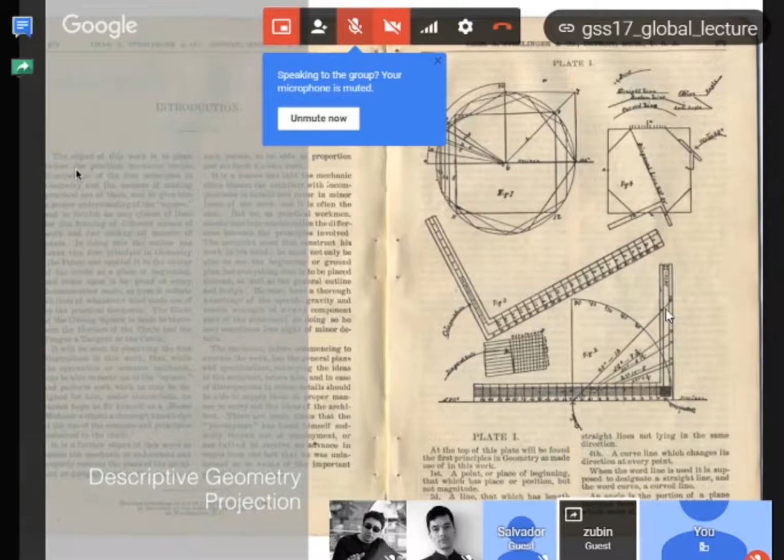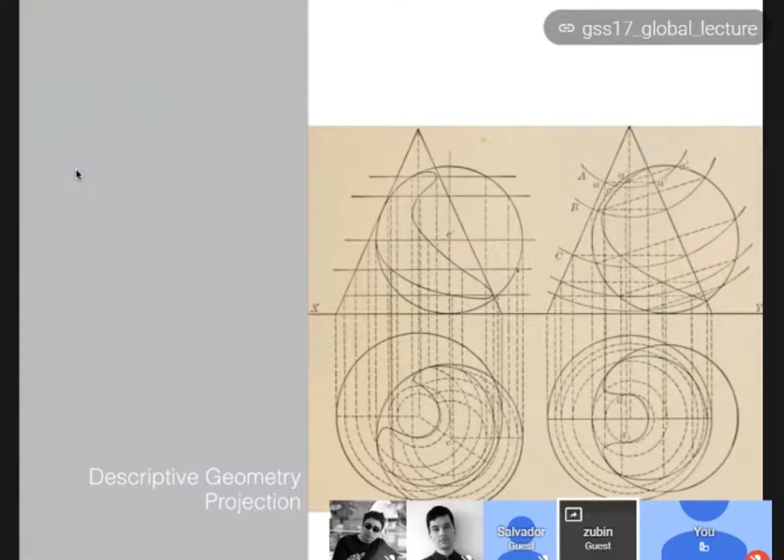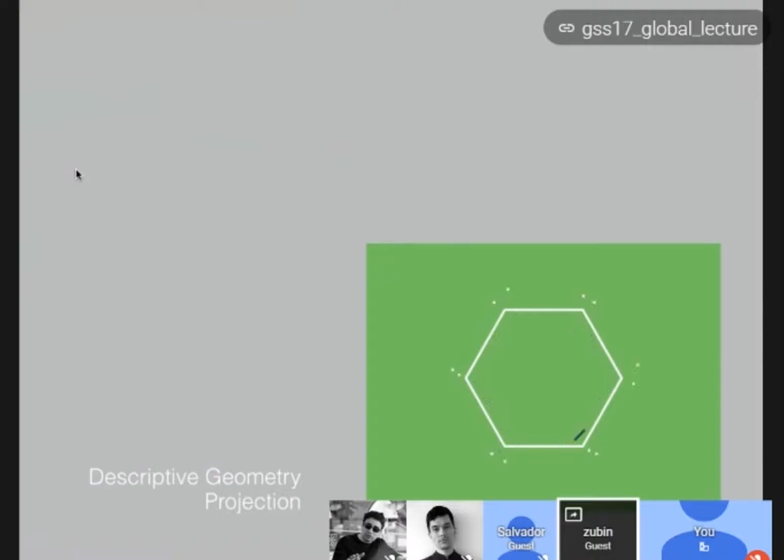In the very first part, architecture was geometry through projection, or let's say descriptive geometry, as a branch of geometry. In this very first use of geometry, architects were trying to project their designs into 2D spaces, so mainly drawings. And that was the very interesting part, to see how 3D objects could be projected into 2D. Through projection, architects started to visualize how their models and ideas could be transferred into drawings and be constructed later on in projects.

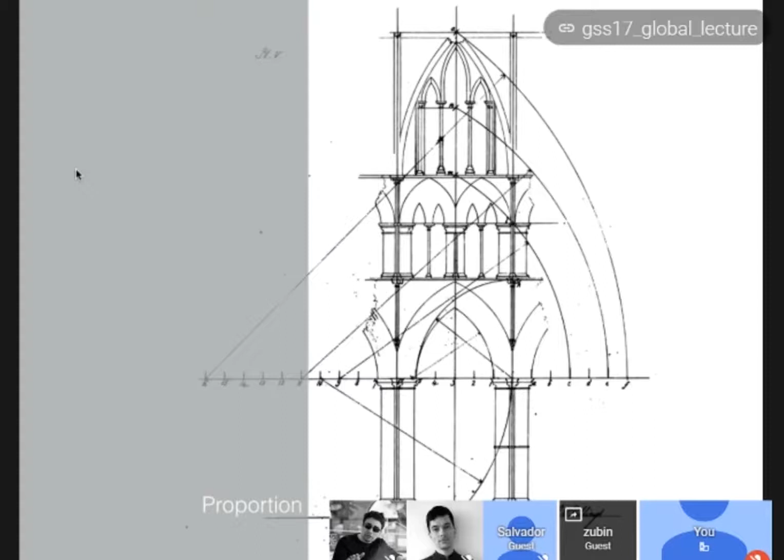But then later, the main topic for architects related to geometry was proportion. Little by little, as the styles of architecture progressed, you can see how proportions started to play design roles in architecture. For example, what would be the ratio of the height of an arch related to its openings, or that kind of studies. And then there was this idea that God had created the world by establishing the principles of order and proportion. This is the quote from Jacques Bénigne Bossuet, a philosopher.

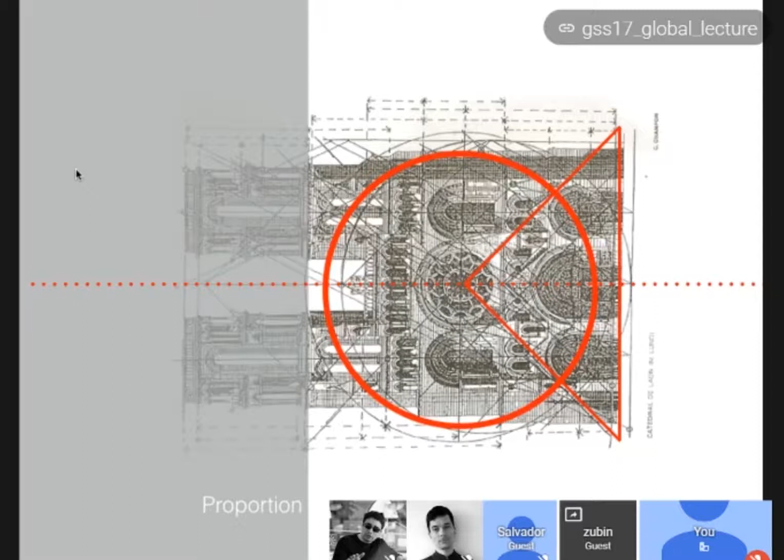And this is the moment where architects would think that they have a sort of power being transferred from God to them. So architects would have the job to see these proportions, the order in architecture, and try to convert it into the physical environment. So proportion would be the next entanglement of architects and the science of geometry. But the next step for architecture and mathematics is proportion versus calculation.

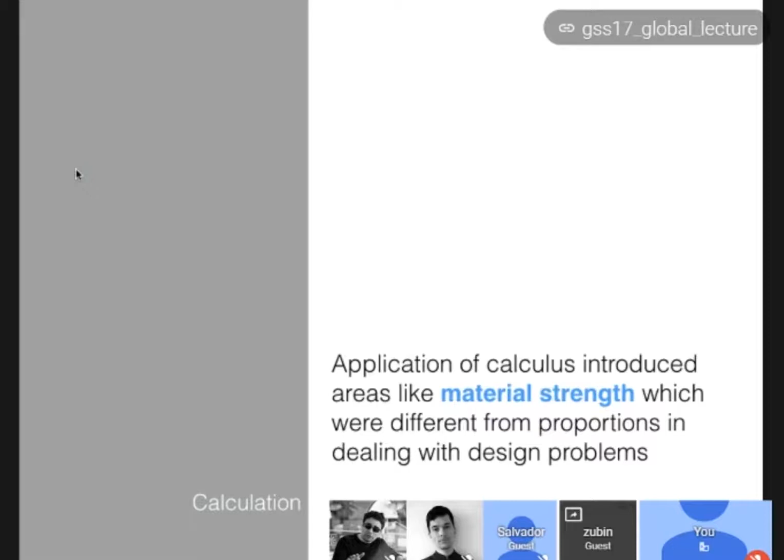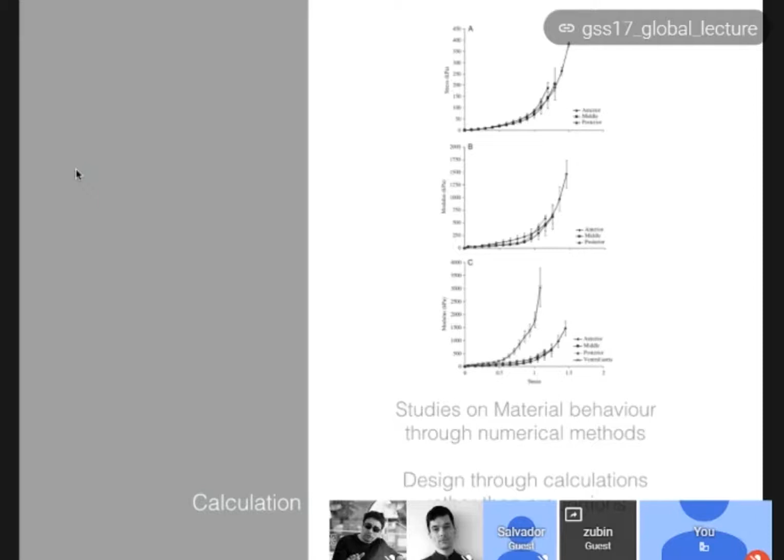So in this part, scientific studies started to appear more importantly in architecture. For example, here you can see that architects started to study material behavior, what the material strengths are, and how we study materials and their behavior in relation to physical laws. This material behavior started to be transferred into design practice, to see how calculations could help us design our projects rather than proportions. So instead of studying the rules of proportions, material behavior and other scientific studies of materials started to appear in the design of projects.

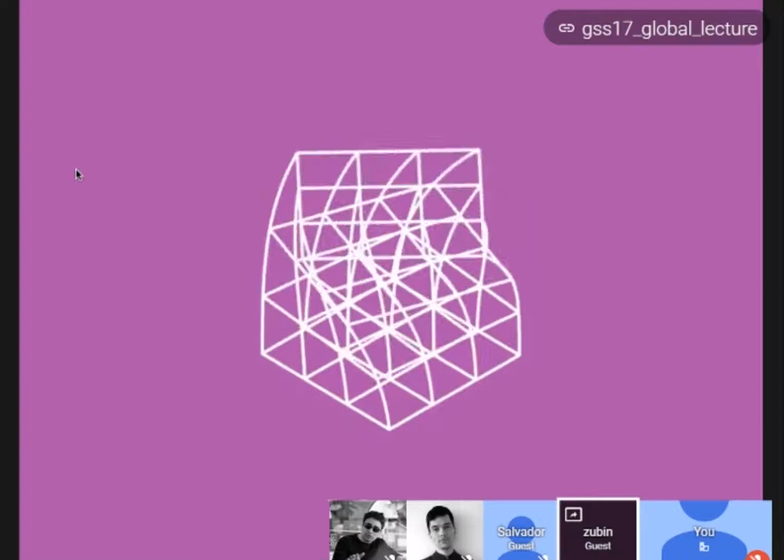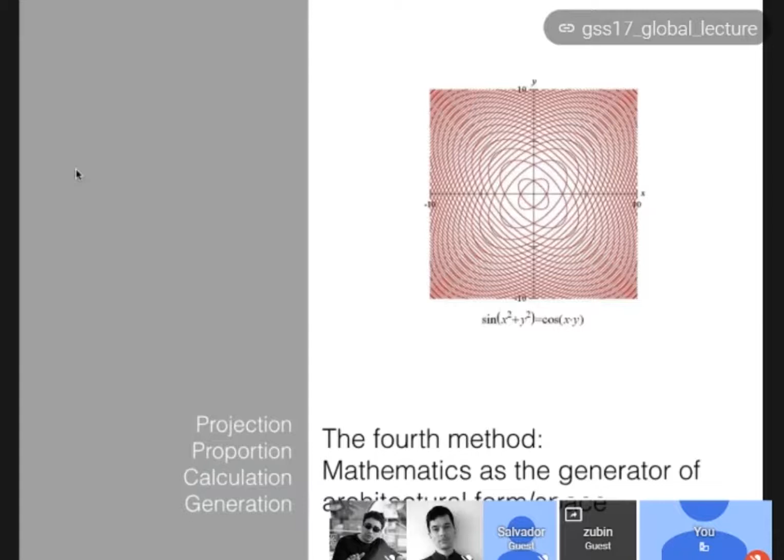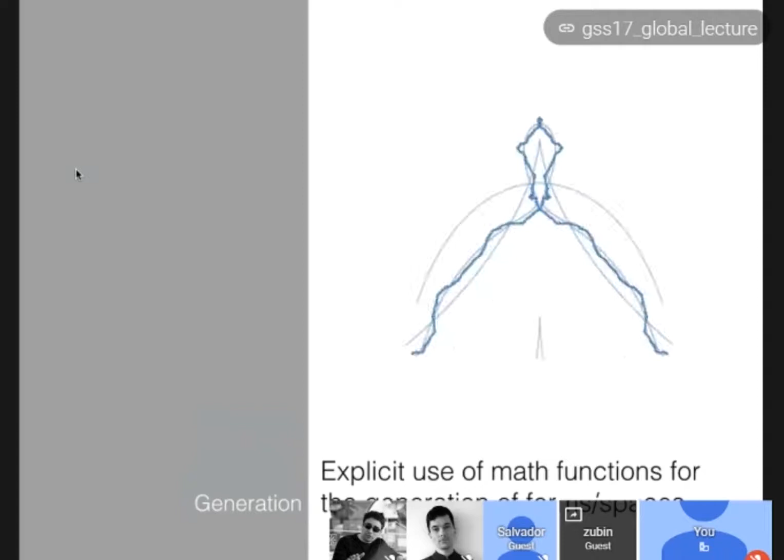So going through these three main stages of the relation of architecture and mathematics, the next stage would be us these days dealing with explicit mathematical definitions, using explicit definitions in our software like Rhino, Grasshopper, Processing or whatever, and trying to see what kind of geometries and spaces we could generate through this kind of experimentation with explicit mathematics. So this is the new state of using mathematics in terms of the generation of space.

And based on these new techniques that I'm sure you're almost all familiar with, we have tried to design and fabricate a couple of different pavilions together with Meron, who is here actually. So these are projects where we explicitly use mathematics. And this is the first one that we worked on together, and I hope you join me as well to do a little bit more description.

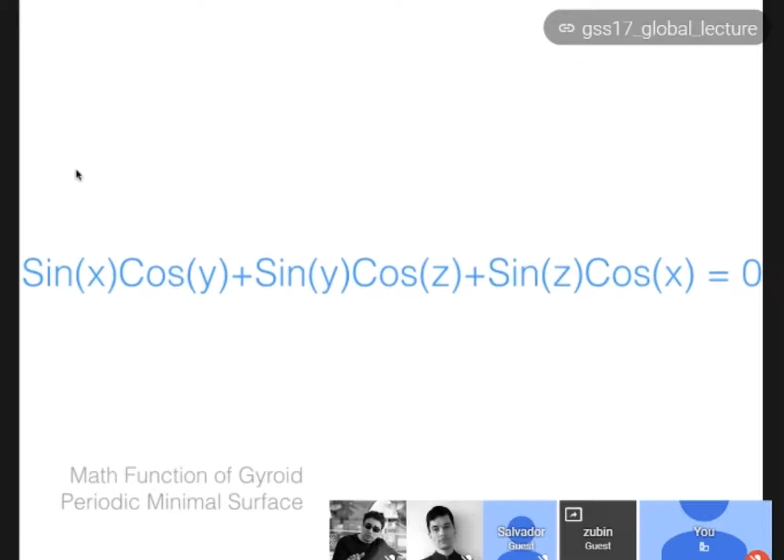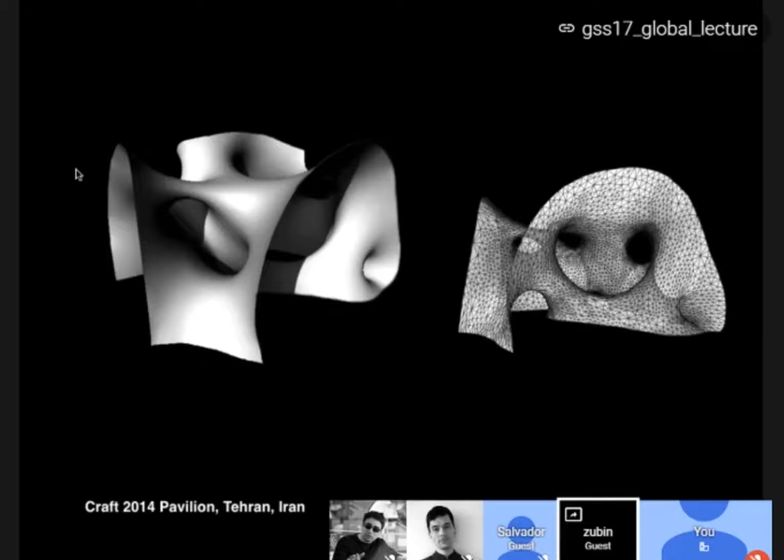The very first example: we had a mathematical definition of a gyroid surface. How do we use this kind of mathematical definition to develop a pavilion project? How could we refine the mathematical definition, how do we interpret it, and propagate it at scale to see how this works?

So there were a couple of different avenues of study. The first one was, as I mentioned before, how we design a project using mathematics. And then in parallel, we were trying to develop composite materials that we could use to fabricate the model we were developing at that stage. So a couple of our students started to explore how composite materials would work for the formation of these freeform surfaces. And this is the example from our 2014 project here in Tehran.

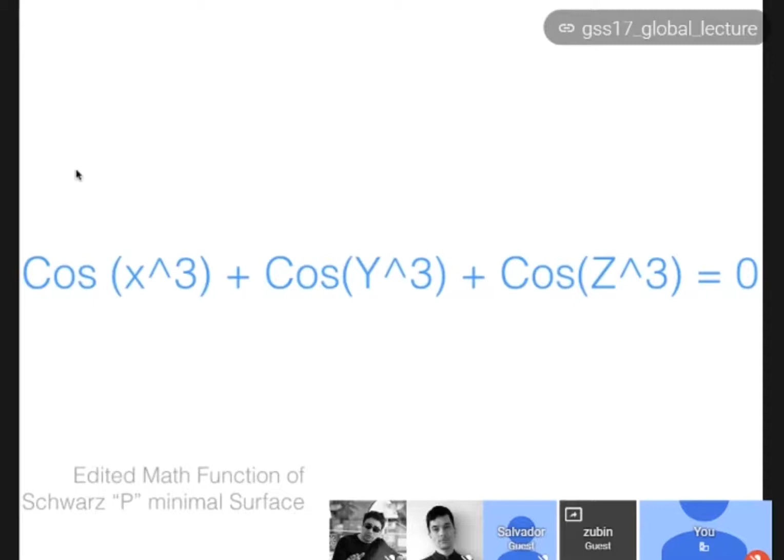It was our first try, and we faced a couple of problems with form accuracy, material strength and everything, but we tried to overcome all the problems by continuing the project. This time we started on another form, again coming from mathematical definitions, this time an edited version of the Schwarz P minimal surface. We again developed similar strategies to see how these thin surfaces could be addressed, also manipulated a little to incorporate other needs of the project. Because it was a pavilion, we wanted to walk inside, we wanted enough enclosure and that kind of property.

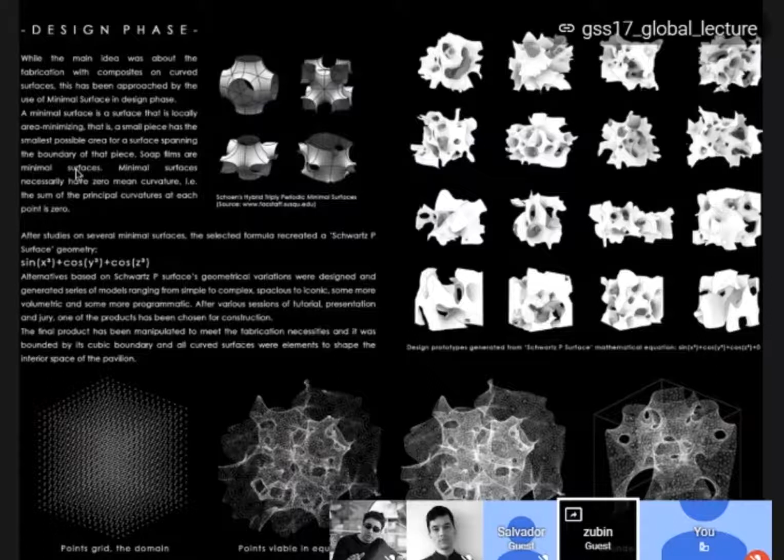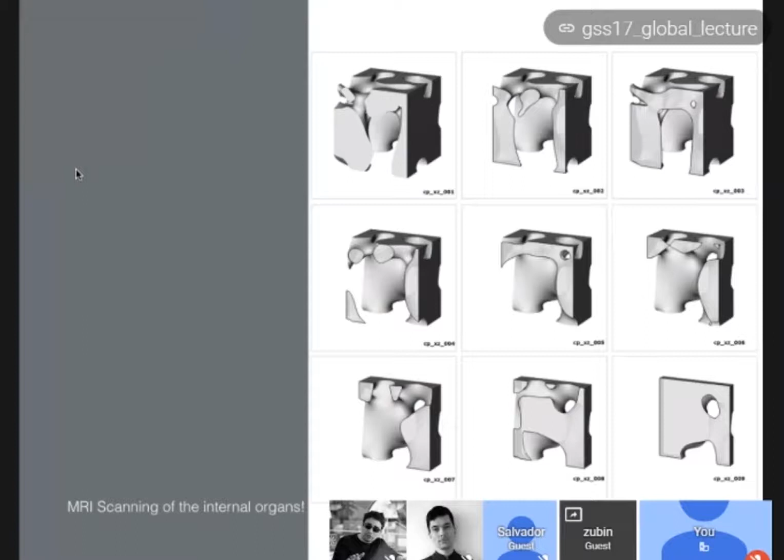So we started to manipulate the formula to see outputs that could benefit the needs we wanted. Here you can see a catalog of some of the generated forms, and then we tried to refine and get the best output out of the catalog. This is the imagination of our students. They wanted the external surface to be like a mirror, with some internal curvy shape. In contrast to the previous year, they wanted a sort of box as the exterior form enclosing the curved surface inside the pavilion. This is a sort of MRI scanning of the project. You can see that we could walk inside; the internal space is big enough to incorporate people inside.

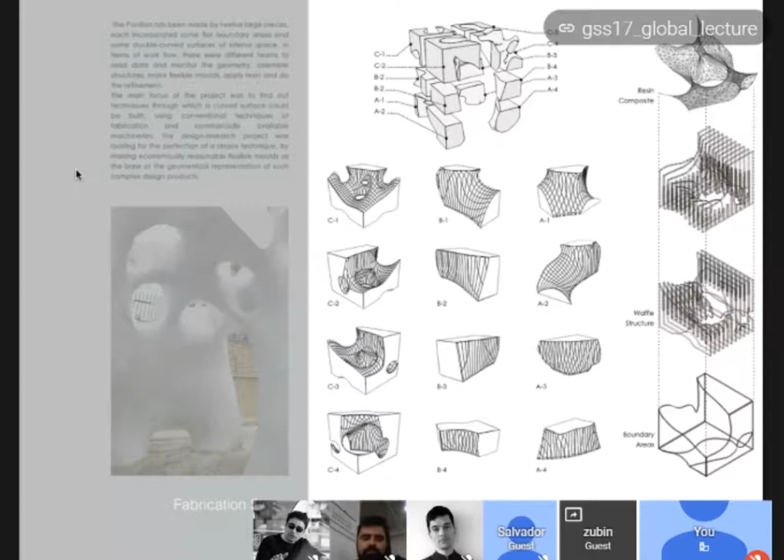For the fabrication phase, this is the process for our previous project, 2014. Because we wanted to transfer all the pieces from upstairs to the gallery underneath, it was an old factory, based on the transportation restrictions we subdivided the pavilion into very small parts. So the assembly would increase the number of errors that we usually meet. So for this pavilion, we tried to see how we could reduce the number of subdivisions but also increase the quality of the surface.

So we subdivided the pavilion into some parts and asked our students to assemble them together and enclose them with fabric formworks. As you can see, the waffle structure does not really do much structurally; the main aim is to generate this double curved surface that we covered with flexible formwork technology. The composite materials were applied to that surface, and then it solidified into the geometry that we really wanted. These are some of the issues we were facing, and we had people who really worked hard to refine the edges, to get rid of all the jagged sort of edges.

I don't know if the video has sound over there as well or not. This is the video of the process that we have been through.

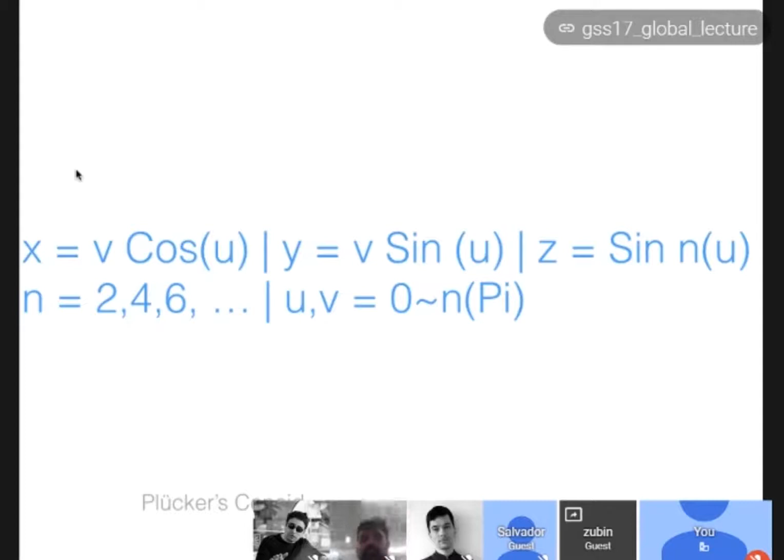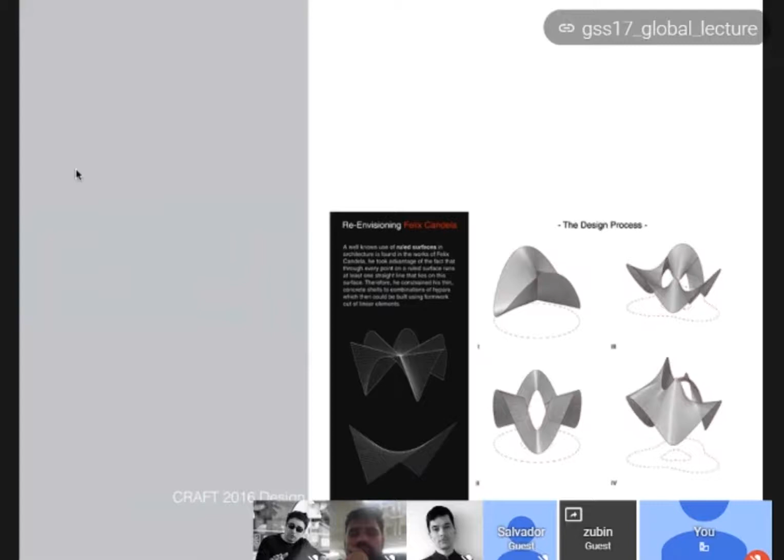So this is the last pavilion that we were working on, this time with Plücker's conoid formula, and it has been again explicitly plugged in to a sort of algorithm that we were trying to develop for our design project. Our idea was to look back at some of Félix Candela's very interesting projects. He was using thin layers of concrete and developing that kind of concrete shells, and we wanted to see how we could really understand the logic behind it and use that kind of logic to develop our pavilion, this time using another technique of fabrication, which is hot-wire cutting of foam.

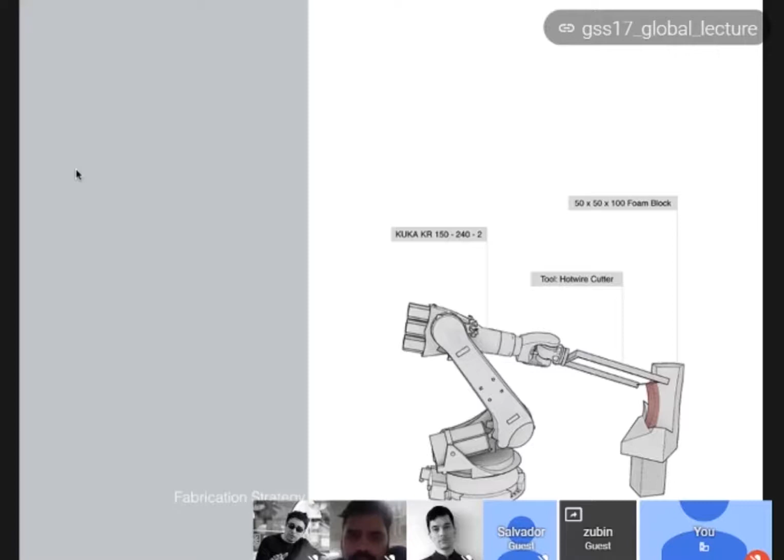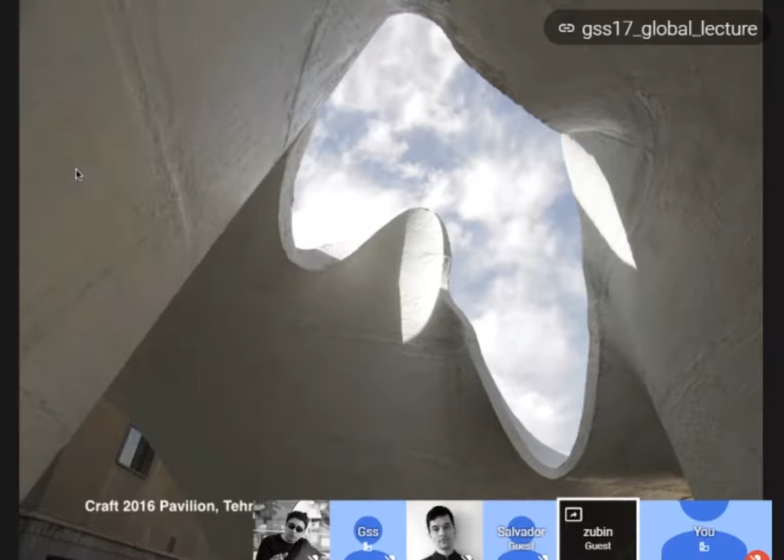Next, we transferred all the pieces to the University of Tehran to apply composite materials on both sides. So the material system was a sort of sandwich structure with a core of foam covered with 2 coats of composites on both sides. Again, our students worked all together to make sure that all the pieces would assemble together and get the final form. And this is the shell that they have been designing together and developing based on the story that I told you. And some of the images that you can see from this pavilion, which is from last year's workshop that we had with Mehran and Kunal and all other friends who are here as well.

Again, I'm sharing the video. Hopefully you can hear the sound as well.